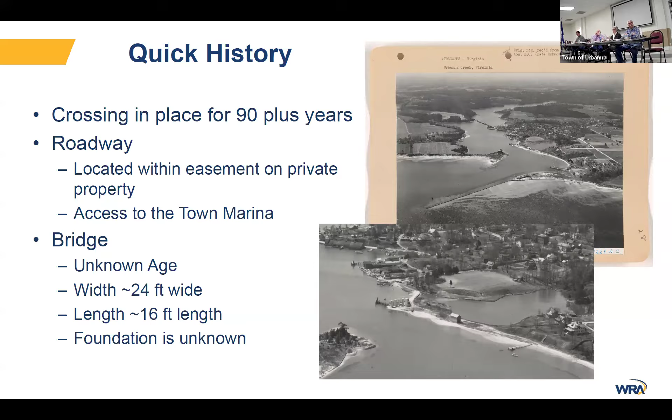So again, working with Ted, we're trying to figure out, we really got two options. Obviously, we know we want to reopen the marina as fast as we can. That is the most pressing item right here, so we want speed. The economics, Bill spoke to about the economics of the solution that's out there, trying to understand what is the long-term goal out there, understand what are the future geometrics.

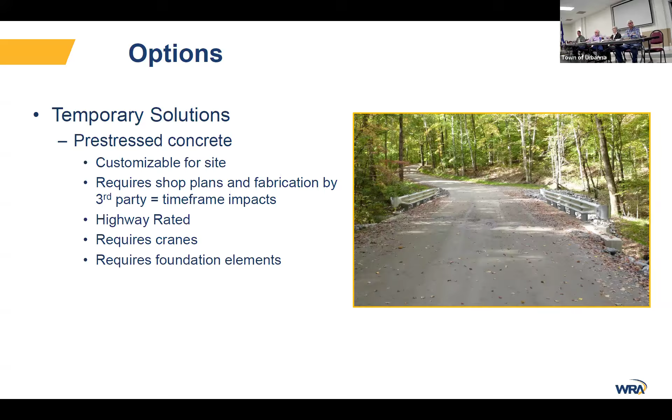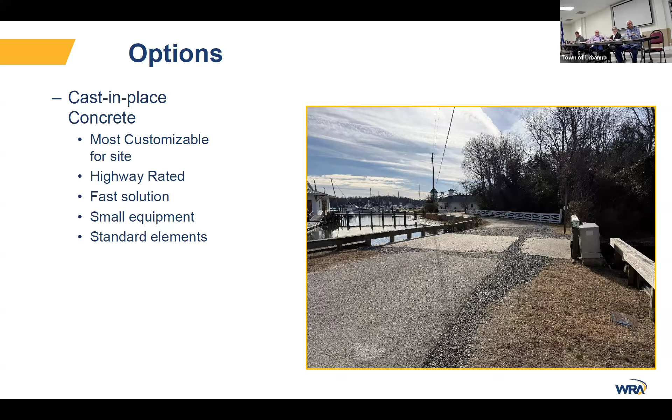Going to a temporary solution to get this reopened quickly, we would be looking at putting any one of those solutions, basically raising up the road, putting this on there, and having some sort of guardrail with a ramp situation to get up and over the bridge. We were not looking at making the full width of the bridge. Again, we're looking at long term, and we want to be able to maintain traffic there at all times, so we were going to put it to one side.

This particular image, we show it to the east side, because there's a water line and a wastewater line on the right side. So we don't want to impact those. We won't be able to get to those in the future in case something were to occur. So this could be something that would look like a solution that's out there. This raises it above the current bridge, so we have no load actually going on that bridge. So, next slide.

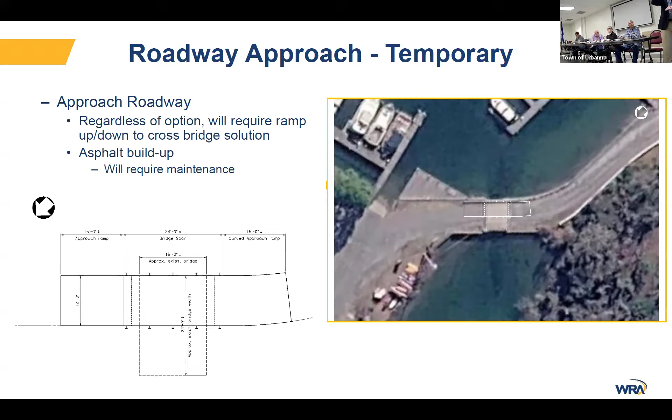And here's the aerial. You can kind of see here's the boat ramp, the little dock area, and about the impact that we're looking at here. Again, all these will require some sort of ramp going up, depending on how deep our bridge is. Next slide, please.

So I'm going to switch over to long term, because there's a lot of things that are associated with long term that impact the ability to work out here.

Unfortunately, permitting is one of the most challenging elements working around the water. There are a lot of what they call time of year restrictions that are out there as far as working in the water. The biggest one is from February 15th through June 15th, for the anadromous fish. And then there's also some birds and bats that we have to work around. Those are dependent. Before I left my office today, we did verify there are bald eagles near here, but they're not close enough to have an impact.

So that one probably would fall out. The bats, they just have to do an inventory of the bats that are in the area and then go from there. So it's one of those things that as we get further along in this. The other big thing is we have to do permitting with potentially the Coast Guard, the Army Corps of Engineers, DEQ, and potentially NEPA. It all depends upon the type of funding that is obtained. If it's all state funding, some of those aren't as stringent. If there's federal funding, there's a lot more stringent elements associated with all of the projects.

Utilities would have to define the Dominion Energy line - how that line comes in, what type of easement it's in, who's responsible for moving it. There's the water and wastewater out there. The water is the town's, so the town can help work with that. The wastewater is HRSD, and we'd have to work through their relocation element to maintain that. Then you have Verizon and Breezeline, which serve the area, and we'd have to work with them. All these things take time and money.

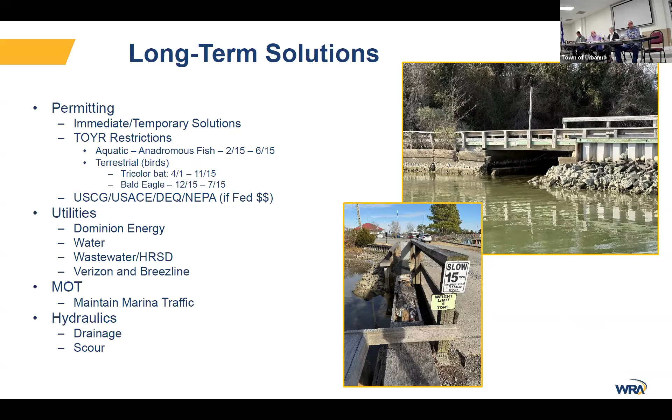When I was out there, I noticed some of the bulkhead was starting to lean in different areas and starting to fail. That's one of the things we'd want to fix while we're out there. Again, that goes back to cost and how big of a project the town wants to look at performing - stabilizing the road, safety elements. I believe there's a lot of pedestrian traffic using the marina and walking into town, so we want to make sure we've taken that into account.

As for the new bridge, there's a lot of new technologies out there which will make it last. We're designing for a 75-year lifespan right now, using corrosion-resistant materials which will not rust. We also use low permeability concrete, which prevents water and moisture from getting in, which causes corrosion and deterioration. We also want something economical and fast.

I mentioned geotechnical, the soils, deep foundation. These piles are going to be really long - 80 to 100 feet, I'm guessing at this point - which will require very large cranes getting out there. So that becomes part of the challenge, also with such a very tight work area ultimately.

Funding comes back to state or federal or a combination, or grants. There's a wide variety of funding mechanisms potentially out there. Ted, I believe you said you were looking at some federal funding last time we talked, and I'm not too sure if you've gotten through the state piece yet or not.

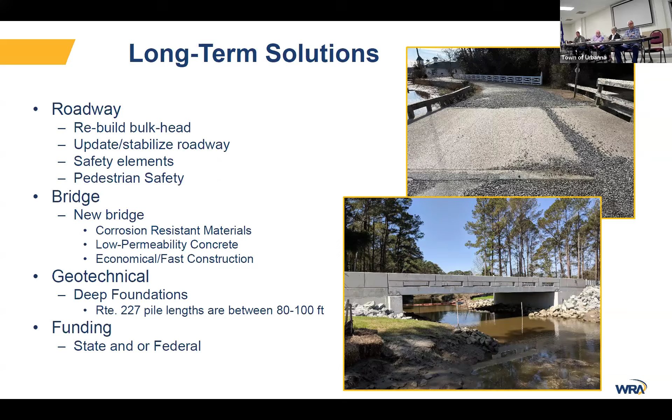And I think that was my last slide. At that point, any questions?

Yeah, I've got a couple. In the letter here, it talks a lot about getting this road and the VDOT acceptance. We don't have any sort of understanding with them if they would pick this road up, right? This is a private road, so we have to be guarded. So they haven't made any sort of indication that they're going to do that, correct? They would be willing to take that road into the state system if we built it to state standards, and it is far below state standards.

Do we have any sort of memo from them saying that? Do we have anything in writing? The reason I ask is, if we're going to build this, I would hate to see us go through the trouble and expense to build it to state standard and then have them not adopt it. Now we've got, well, if we had the option, we could save ourselves some money and do it to a lesser private road standard. That to me is the crux of this whole thing.

It sounds like a really good, solid proposal, but just to answer your question, I can get that in writing, but it's basically going to be the VDOT rules and regulations say you got to have this much right of way, this much sub-base, this much pavement. So I can get that.

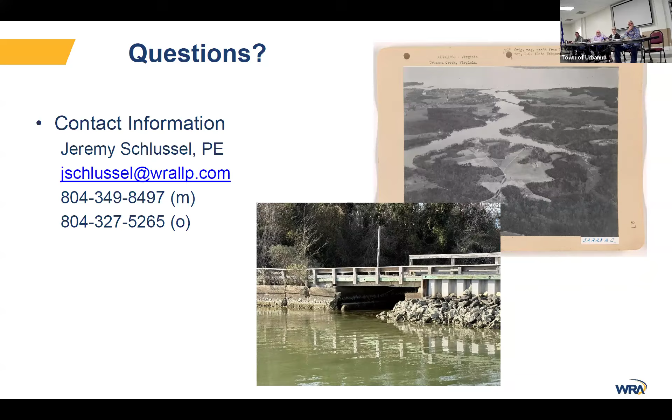But if we flip back, that's going to be hard to get a decent-sized boat trailer across, because you're coming off that ramp, taking that turn, and funneling into that guardrail with the slope on the ramp. The slope may be a little deceiving—it's about 1 to 12, so it's a very gradual slope. But that goes back to how wide it is and where the trailer can be turned.

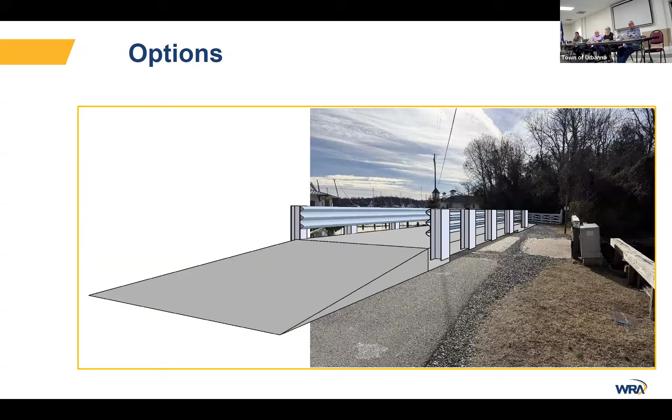Not knowing all the specifics, he said purchasing a bridge could be around $50,000. But then you have to consider the roadway work associated with it, the labor with the contractor getting it all in there, and the shipping—that particular bridge comes out of Pennsylvania. It's not terribly far, but they'd have to get it down here. Either case, we're probably looking around $100,000 to $150,000 for either one.

A lot of it depends on how the town will go about a contracting mechanism—whether you go sole source and pick a heavy civil contractor, or invite three in and say, please give us your best bid on this.

So would you be hiring the people to put it in, or would we be doing that? The town would be hiring. Okay, and would you provide the engineering specifications? Yes, we can provide the engineering documents. And how much might that be?

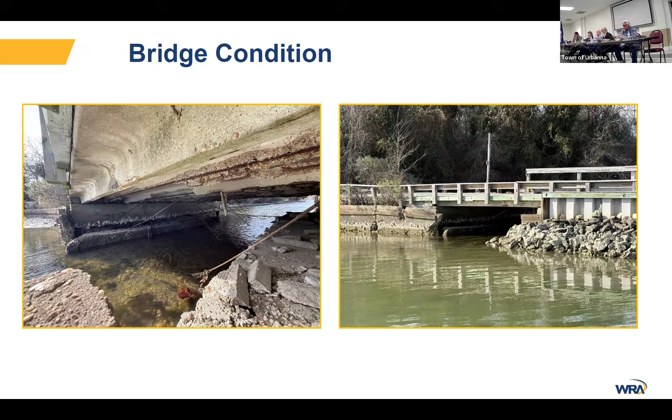With the temporary bridge, you can see that's a gravel roadway in that sample photo. We'd probably be looking at doing asphalt, and you will have asphalt maintenance costs associated with that. Right now VDOT handles the town's roadway maintenance, like asphalt. So that would be an expense the town would have to bear every so many years, because vehicles crossing will wear that asphalt out. Rule of thumb, every 5 to 7 years you'd probably have to do some asphalt work, assuming it's out there that long.

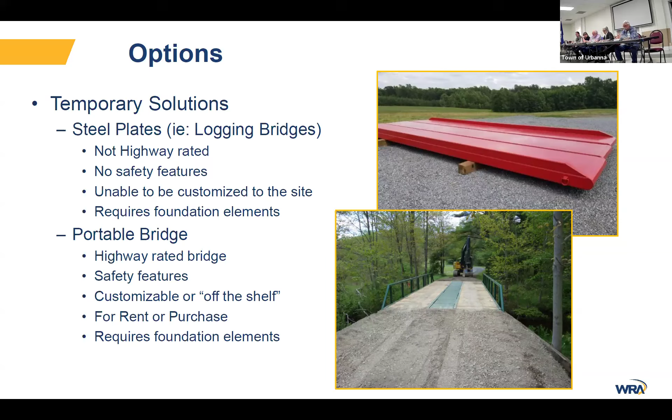And do you know what he said, Billy? He said we need to get an engineer to look at it. All right. Any response from anything? I can tell you.

On the bypass option, I talked to a former town employee about it - he came to me. He said there's nothing in the town record because it never became formal, but it was suggested by an engineer who came down in the late 90s or early 2000s. He looked at the bridge, was trying to find a low-cost option, and suggested that. I followed up on it a little. I contacted VMRC to start, because it's a permitting thing, and we'd have to acquire land on the other side of that split rail fence to do it. There's a lot there, but that would give us good access to get small boats in and out, and if we could get rid of Havner Bridge, I think that's worth at least investigating.

Now, what are you talking about? So they'd cut a canal on the other side, past the fence, past the little kayak launch - I understand that used to be the inlet, that's where the water was. It's an idea, honestly it sounds a little nutty, but it also sounds intriguing. I don't know if it's a possibility, but it would be nice to find somebody who could tell us, because then we'd get rid of a bridge structure and open up the backside of the marina to small boat traffic, with a nice protected area.